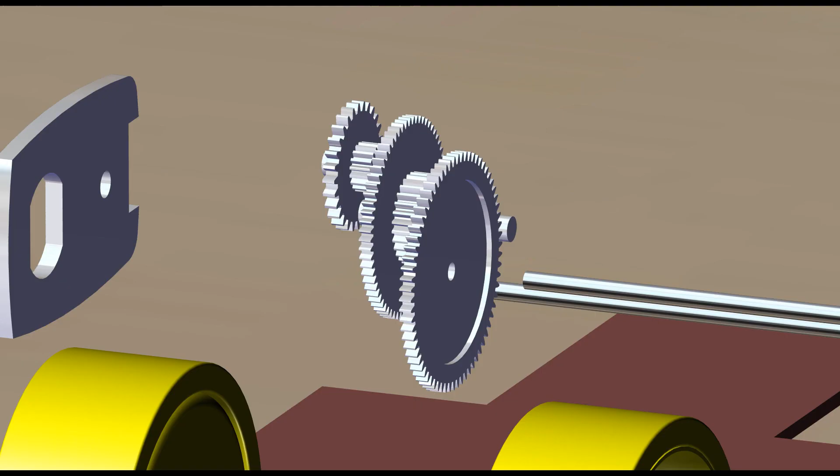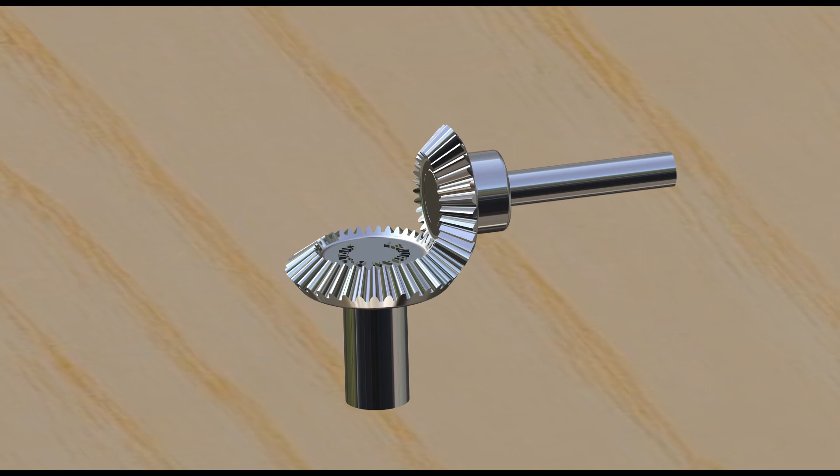Over the upcoming episodes, we will delve into a wealth of information about gears, from their fascinating history to the basics, exploring various terminology, and uncovering more details about how gears work. Have you ever wondered how things around your house work so accurately? Well, it might just be the magic of gears.

Now, take a look at this classic mechanical wall clock. It keeps ticking away, telling time with precision. But how does it do that? Have you ever thought about how these clock hands move so accurately? Let's find out. The secret is gears.

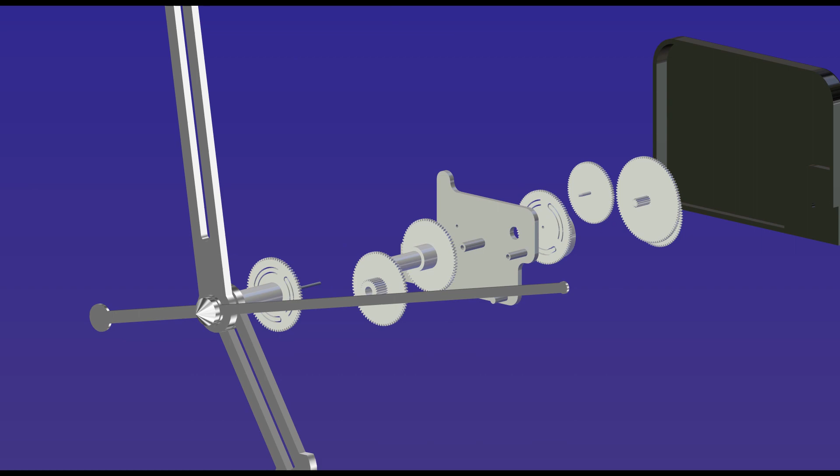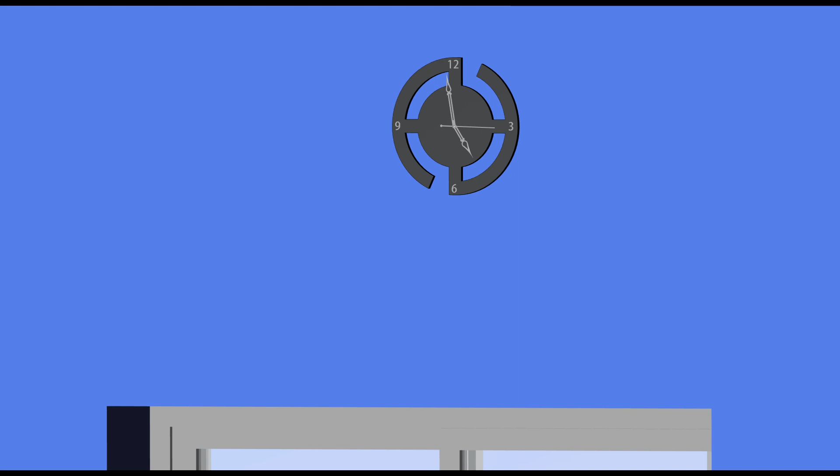Just like in a clock, gears are these amazing little wheels with teeth that work together to make things move smoothly and precisely. But gears are not just for clocks. They're like the unsung heroes in many things we use every day. Let me show you. Look at this hand mixer. Can you guess what helps it work so smoothly? Gears work inside for that perfect mix.

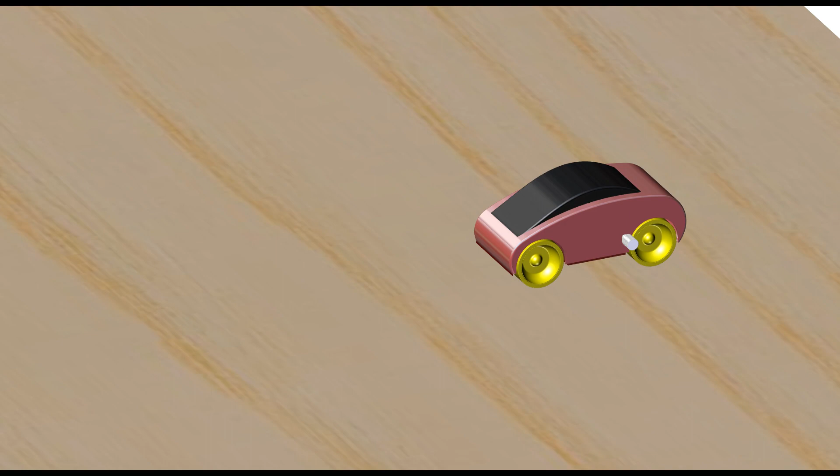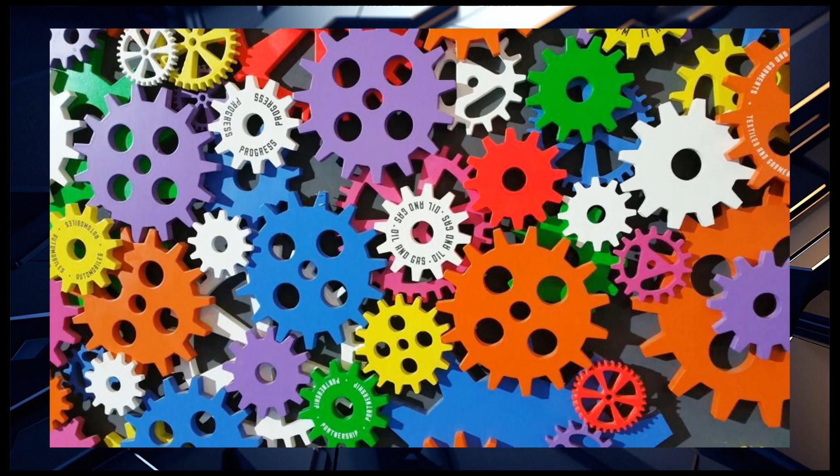Now, let's shift gears and have some fun with toys. Look at this wind-up toy car. Can you guess what's driving the fun? That's right, gears. When you wind up this little car, gears inside start turning, bringing our toy to life. It's like a tiny gear-powered race car. Gears might seem like small components, but they play a big role in how many machines work.

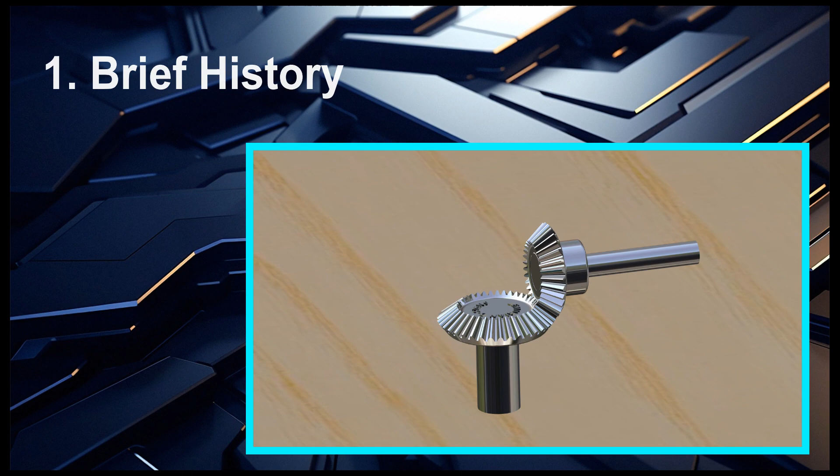Gears also play a fundamental role in many machines, from simple applications like bicycles, to complex systems like automobiles and industrial machinery. In this video, we will kick things off by uncovering the brief history of gears and understanding the fundamental basics. We will also explore the terminology that surrounds these mechanical marvels. So, buckle up, stay connected with us as we embark on this exciting journey into the heart of gears and their intricate world. Now, let's learn the definition of gears.

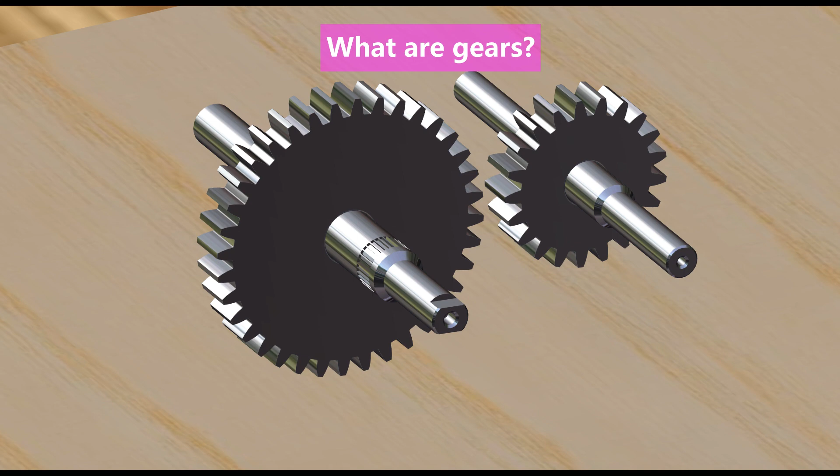What are gears? Gears are special mechanical parts with teeth that fit together and rotate to transfer motion and power from one shaft to another shaft. Let's learn the major functions of gears. Number 1. To transmit motion. Here, the motion is transmitted from first gear to second gear. Number 2. To change the speed and torque. Here, the larger gear takes a long time for one complete rotation, compared to the smaller gear.

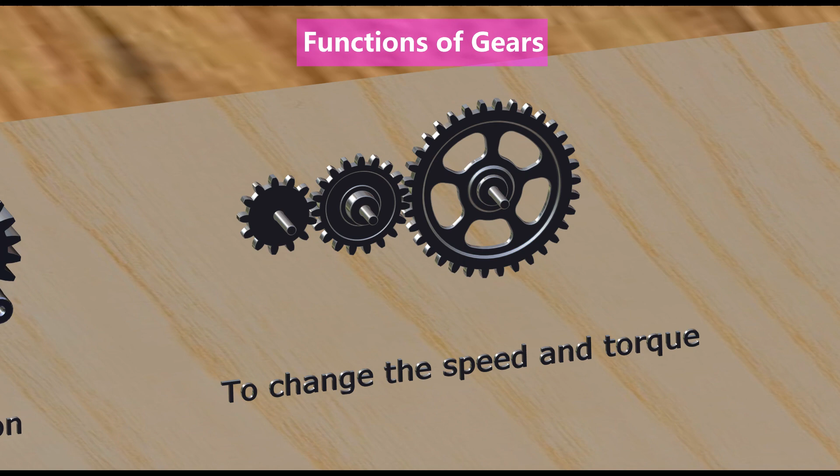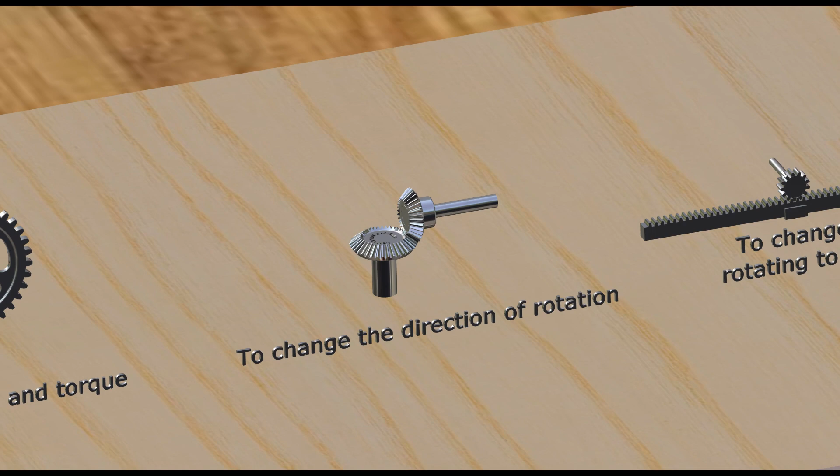Number 3. To change the direction of rotation. Number 4. To change the motion from rotating to translating motion. Gears come in different sizes. The size of the gears helps to control how fast or slow things move.

Let's learn the history of gears in short. The earliest examples of gears date from the 4th century BC in China, which have been preserved at the Luoyang Museum of Henan Province, China. The earliest preserved gears in Europe were found in the Antikythera mechanism, an example of a very early and intricate geared device designed to calculate astronomical positions. Its time of construction is now estimated between 150 and 100 BC. We will learn the complete gear history in a separate episode.

Now let's move on to gear terminology.

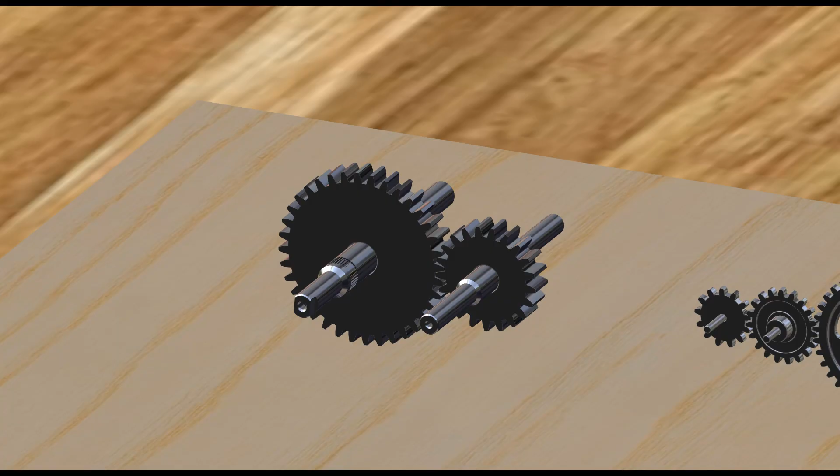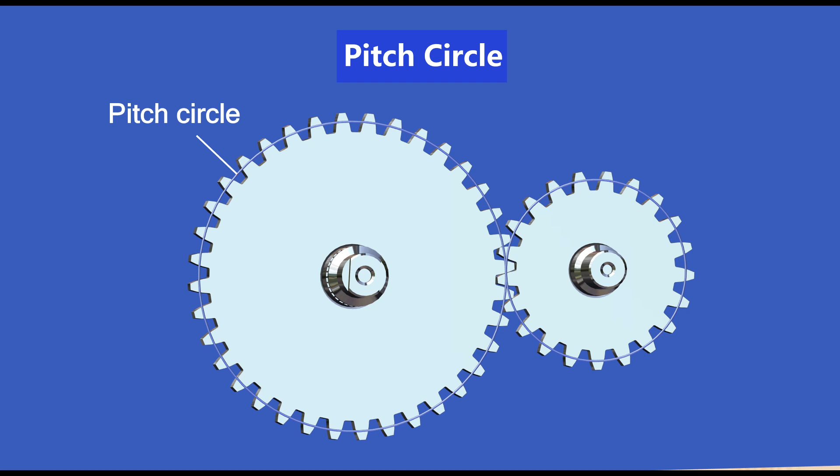Now, let's learn the gear terminology. What is gear terminology? Gear terminology includes definitions used to describe gears and the terms needed to make them. Pitch circle. It is an imaginary circle passing through the center of the gear's teeth, where the teeth effectively mesh with other gears. Pitch circle diameter.

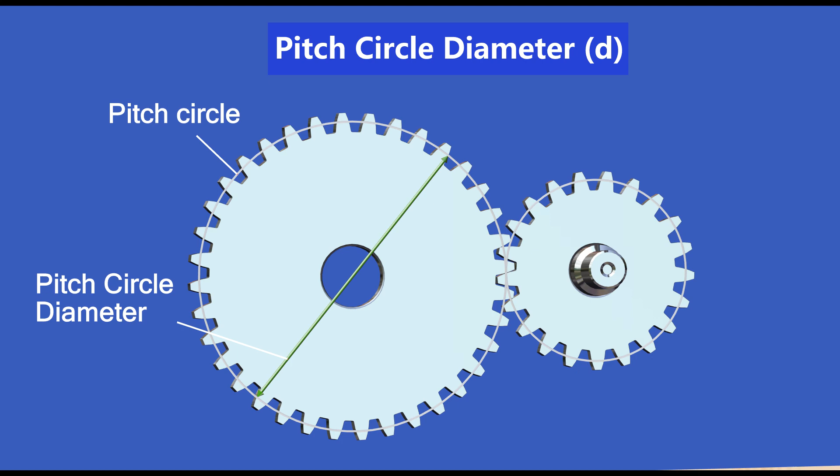The diameter of the pitch circle is called the pitch circle diameter. It is used to calculate gear ratios and design gears. It is indicated by the symbol d. Pitch point. When the two gears are meshing, the point where they make contact is called the pitch point.

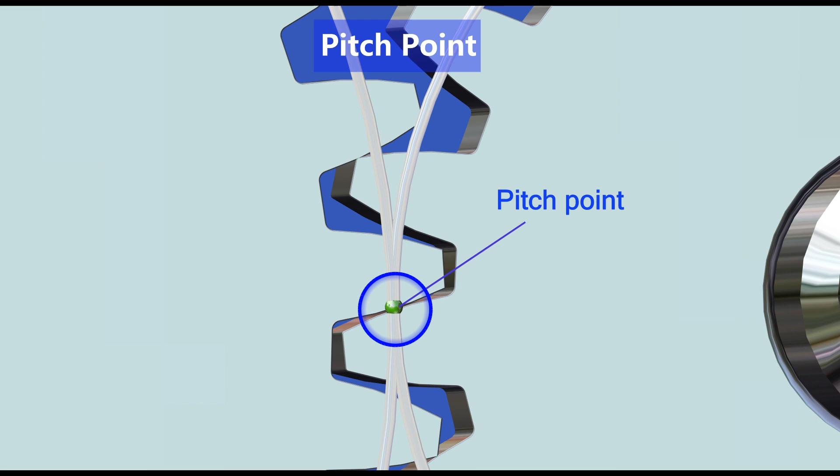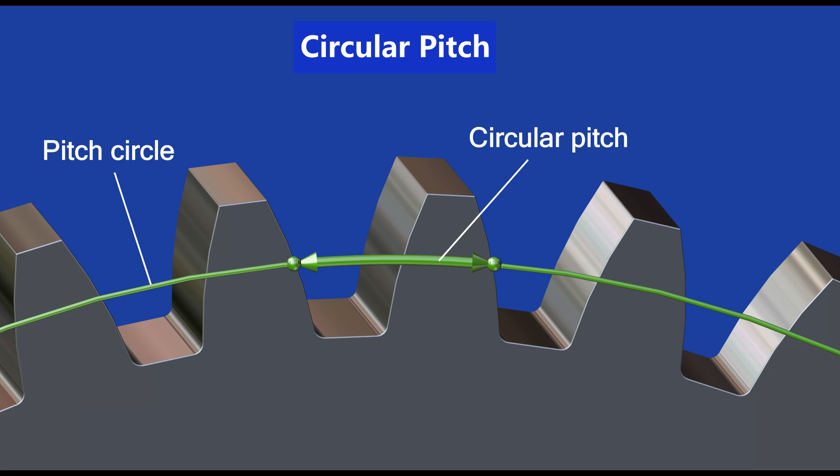Circular pitch. The distance measured from a point of the teeth to the same point of the next teeth, measured along the pitch circle, is called the circular pitch. Top land of the tooth. The flat, top surface of a gear tooth is called the top land of the tooth. It is like the roof of the tooth.

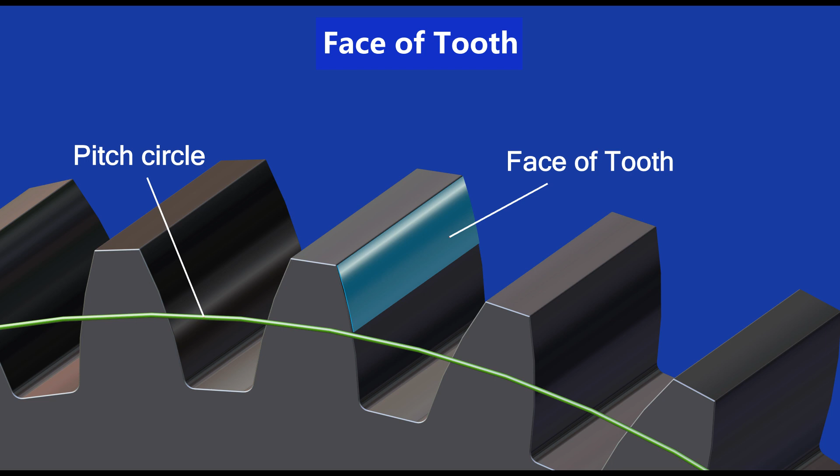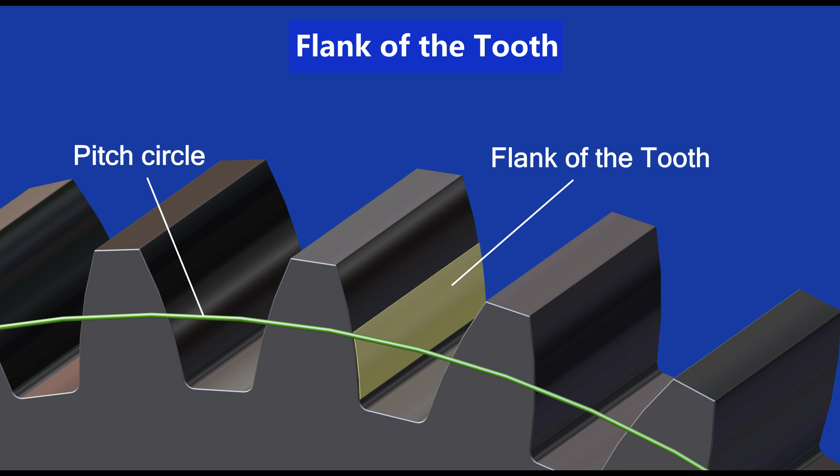Face of tooth. The surface of a gear tooth facing outward above the pitch circle is called the face of the tooth. Flank of the tooth. The side surface of the gear tooth lying inside the pitch circle is called the flank of the tooth. Face width. Face width is the distance from the front face of a tooth to the back face of the same tooth. It is indicated by symbol B.

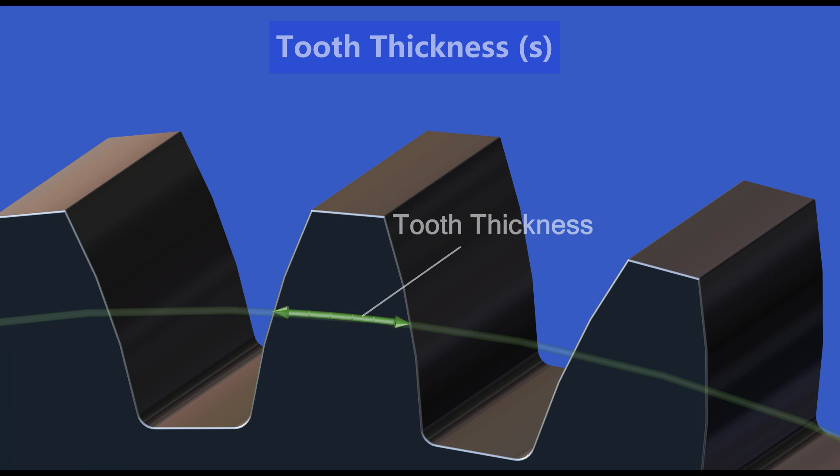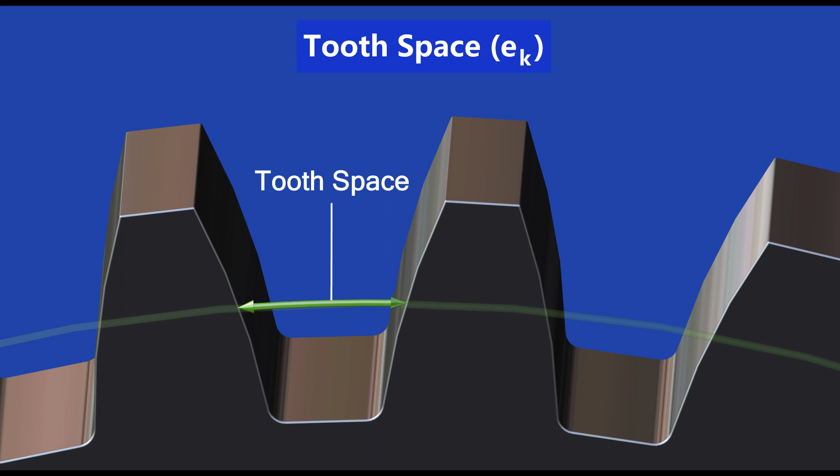Tooth thickness. It is the width of a single gear tooth at the pitch circle. It is indicated by symbol S. Tooth space. The distance between adjacent teeth, measured on the pitch circle. It is the space where you can put your finger between two gear teeth. It is indicated by symbol ek.

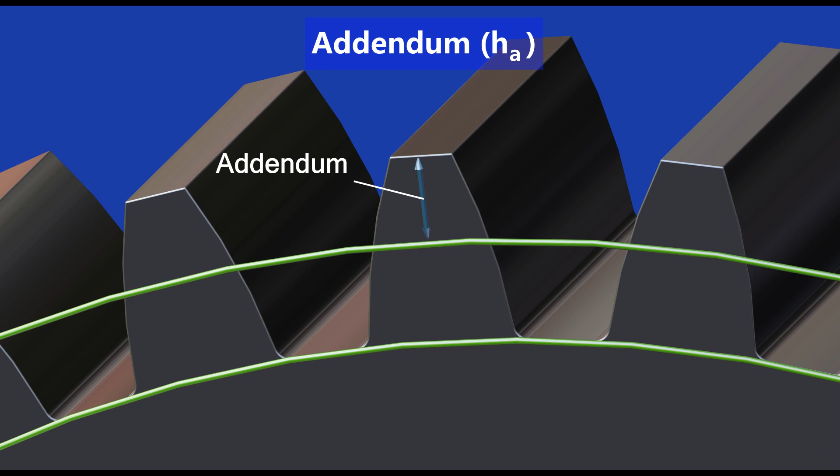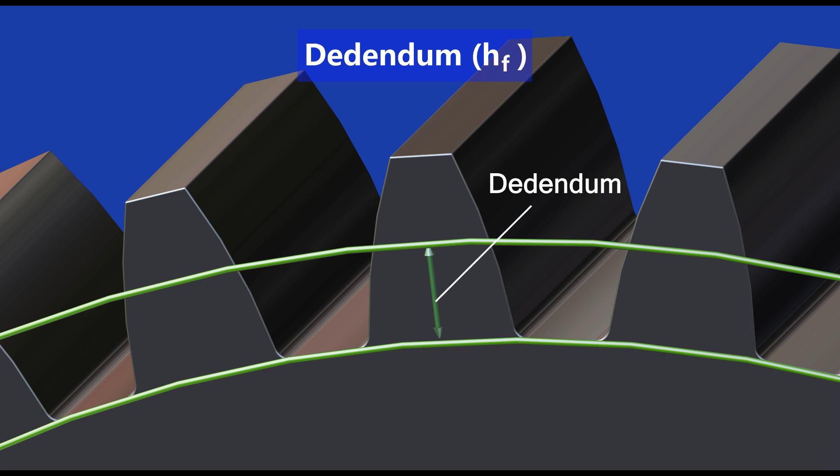Addendum. The addendum is the distance from the pitch circle to the top of the gear tooth in radial direction. It is indicated by symbol HA. Dedendum. The dedendum is the distance from the pitch circle to the bottom of the tooth in radial direction. It is indicated by symbol HF.

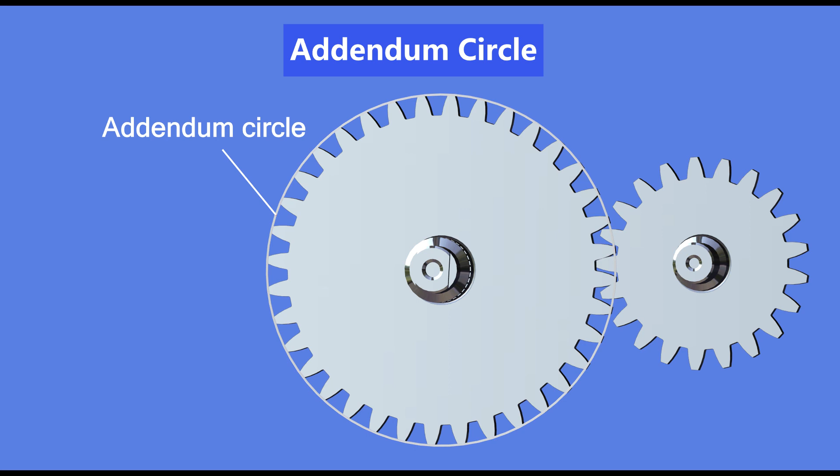Addendum circle. The addendum circle of a gear is an imaginary circle drawn through the tops of the gear teeth. It's the circle that touches the highest point of each gear tooth. The diameter of the addendum circle is indicated by symbol DA.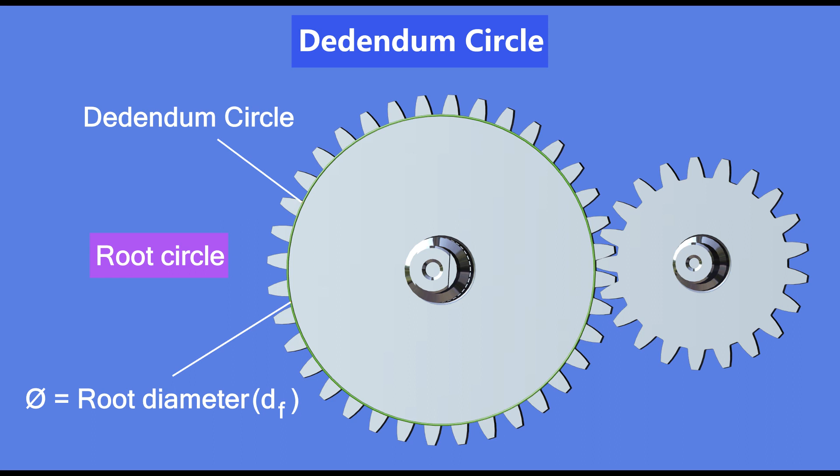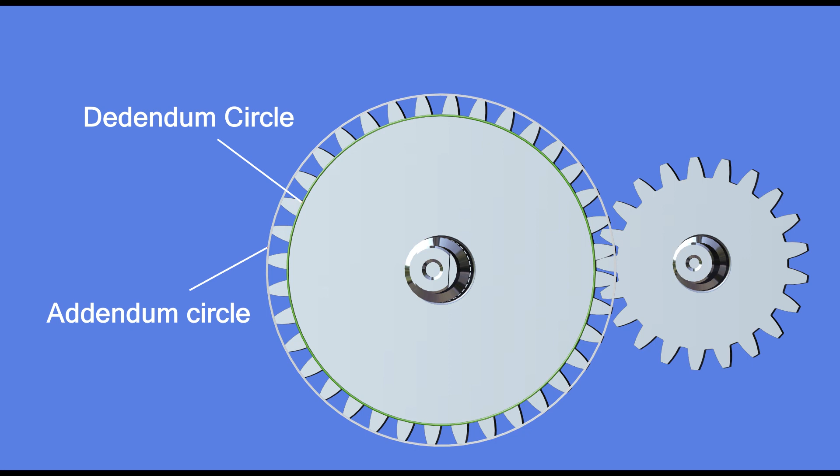Dedendum circle. The dedendum circle of a gear is an imaginary circle that corresponds to the bottoms of the gear teeth. It's the circle that touches the lowest point of each gear tooth. It is also called the root circle. The diameter of the root circle is called the root diameter. It is indicated by symbol DF. Both the addendum circle and dedendum circle are important design elements in gears, helping to ensure effective and smooth operation when gears come together to transmit motion and power.

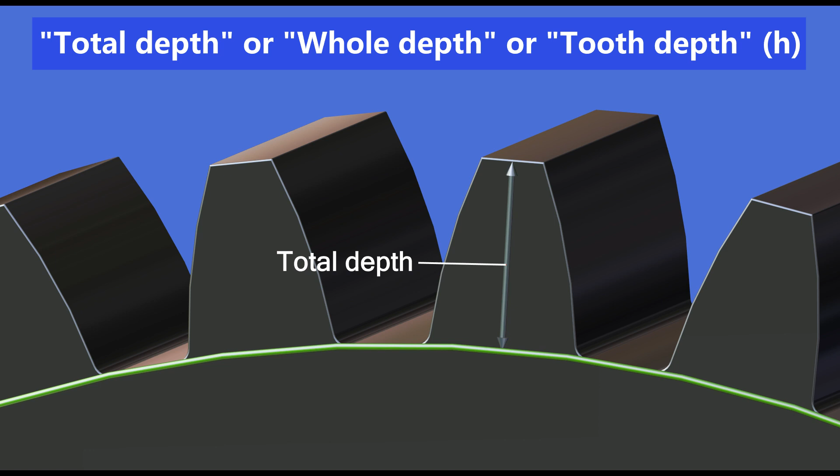Total depth, or whole depth, or tooth depth. It is the distance from the top land of the tooth to the bottom of the tooth. It is also defined as the distance between the addendum circle and dedendum circle, measured along the radial direction. It is the sum of both the addendum and dedendum of the gear tooth. It is indicated by symbol H.

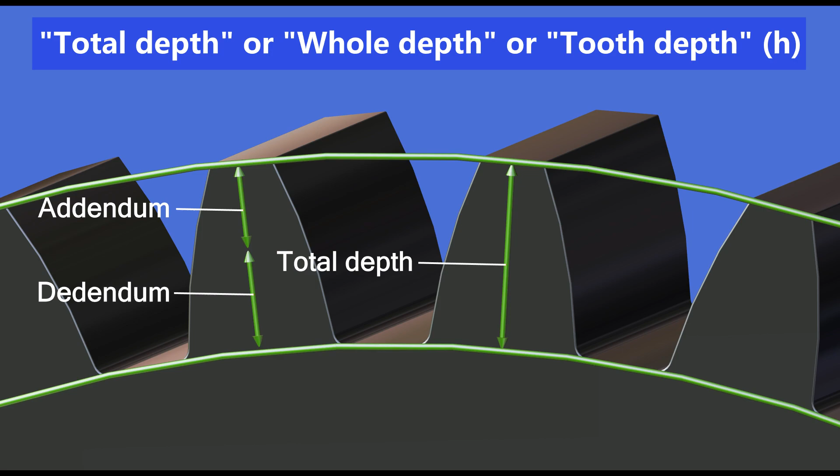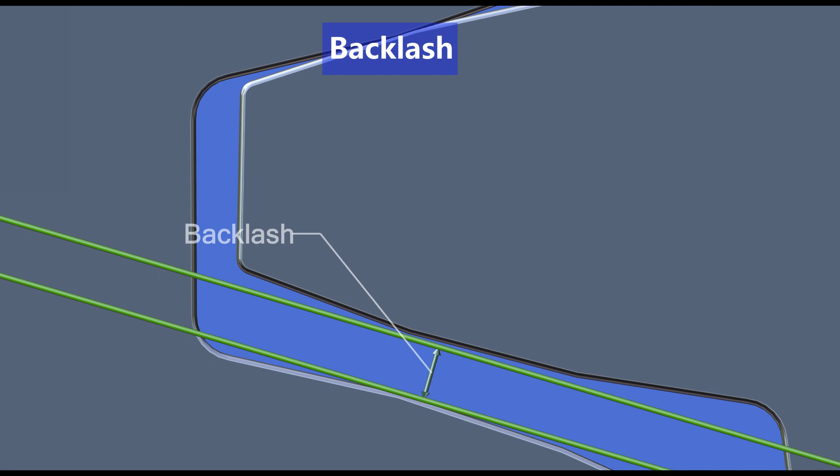Clearance. When two gears are in mesh, the radial distance between the top of the tooth of one gear and the bottom of the tooth of another gear is called clearance. It is indicated by symbol C. Backlash. Backlash in gears refers to the slight gap or looseness between the teeth of two interlocking gears. This gap is intentional and allows the gears to rotate smoothly without getting jammed or causing excessive friction.

In the next part, we will discuss the various types of gears, gear train, gear ratio, and more gear terms.